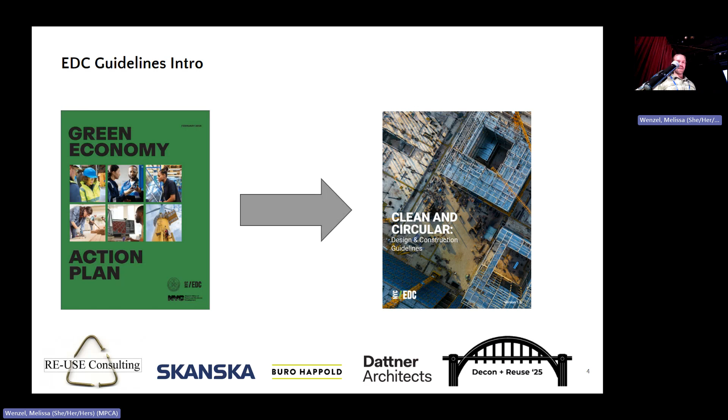And as part of these guidelines, I thought they did a really nice job of laying out some clear goals. These goals, I think, are fairly familiar to a lot of us - they're around diversion.

So the three goals being C&D diversion 75%, focusing on concrete and soil, 95% recycling or reuse, and requiring 25% minimum low carbon materials. And I would say actually we probably have some work to do with telling a better story around these goals, but for us...

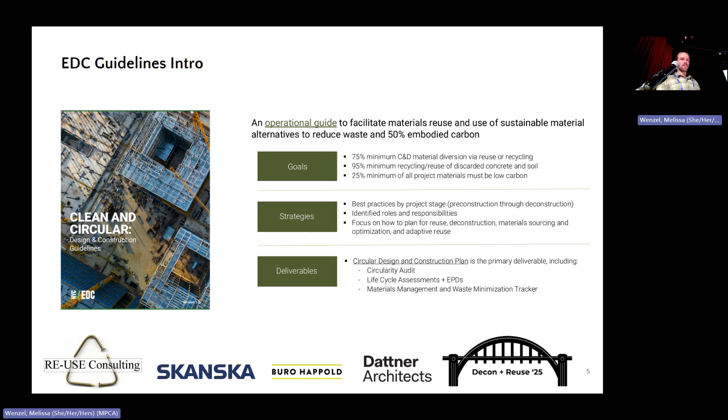It was a major catalyst for starting the conversation and thinking about what infrastructure for circularity is required in the city. So we all were brought together by a pilot project for this circularity guidelines called SPARC, which you'll hear about a bit more.

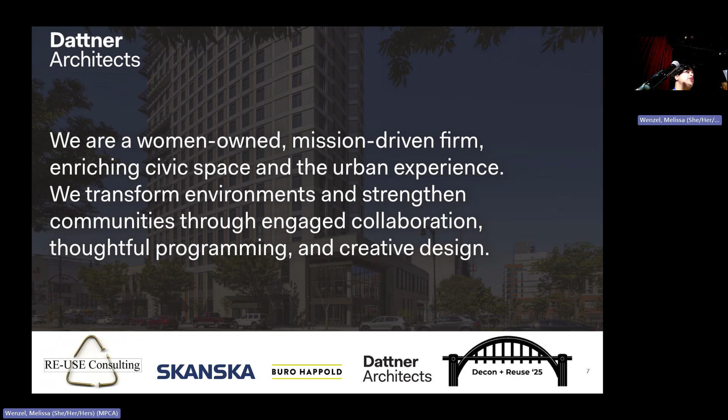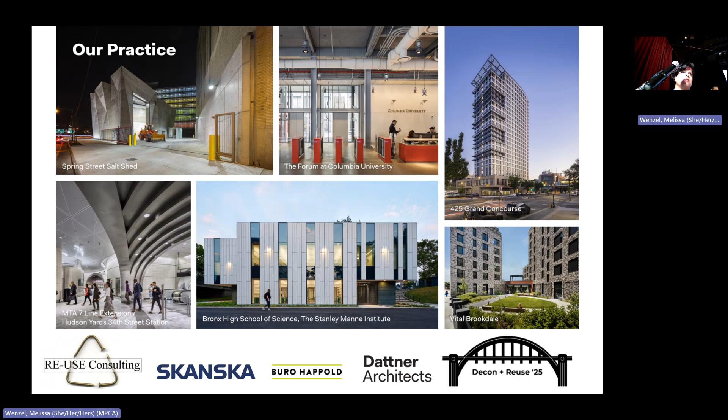So as I said, I'm with Dattner Architects. We're a women-owned architecture firm in New York City. Our work is what we like to call civic architecture. We have a studio that does affordable housing, a studio that does multifamily housing, mostly affordable, a studio that does transportation and infrastructure, and a studio that does cultural work, which includes education.

And so as part of that, and also as a practice, we're really passionate about sustainability. We're about 135 people, and of those 135 folks, 90 people are in our sustainable practice group. So it's pretty clear that's a big part of our firm ethos and why people want to work here. We have this internal sustainable practice group that's been really interested in circularity as a concept, and how we can set ourselves up to be ready to do a future circularity project.

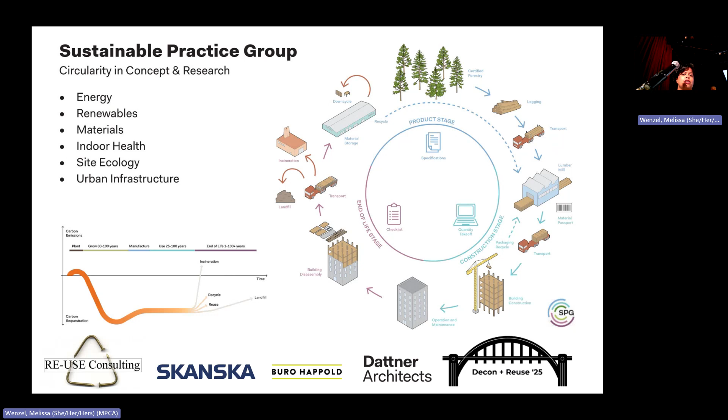A lot of our initial research was revolved around mass timber. And then, as Luke mentioned, NYCEDC released an RFP for the SPARC Kips Bay project, which really gave us an opportunity to talk about circularity in practice. So that's kind of how we all came together.

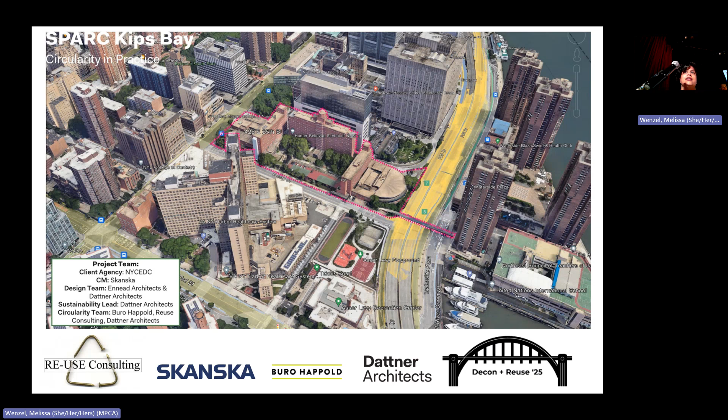So the client is EDC, and the primary stakeholders are the City University of New York and a New York City public school. The project is currently a CUNY campus. Because it is in New York City and an ultra urban area, the campus is very vertical instead of horizontal. The design team is Ennead Architects as the prime, Dattner is a sub, and part of our scope is the sustainability lead.

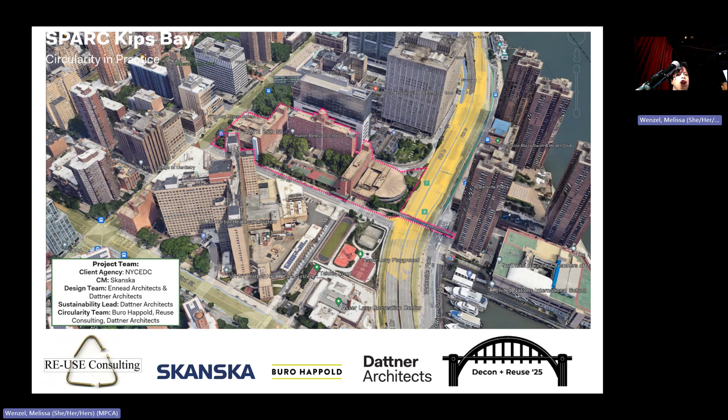And the circularity team is really Buro Happold, Reuse Consulting, Dave, and ourselves. And really the initial challenge was, how do we talk about deconstructing a 400,000 square foot building that was built in the late 50s? It really was not built with deconstruction in mind, and there was still a lot of hazardous material, and it was very much and is very much an active college campus.

But as you can see from these photos, there's this wealth of material in there, and it was really exciting to walk through the building with Dave and with the Buro team to think about how do we start doing this. How do we document all of this? How do we put this together? And how do we generate interest in the market so people will be ready to receive the material when we start work.

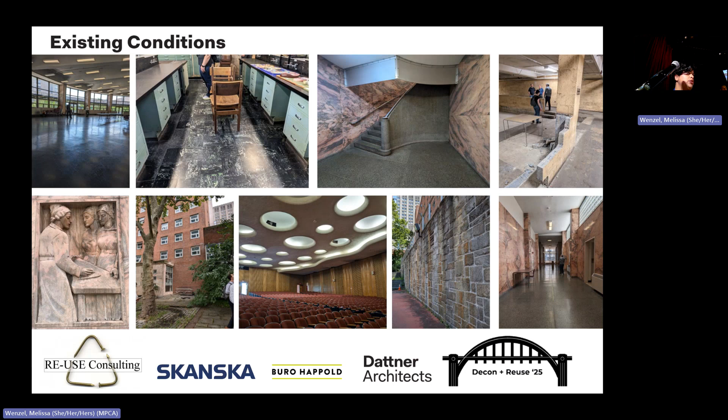So we're gonna, Jimmy will talk about it, but we're gonna start work in February. Okay, so basically what we did and where we are now is we did an audit of the existing building, which included creating all these tags and having this blue beam session.

So teams of two walked through the entire building, tagged each room with the material that was in there, and provided some qualitative information about it. Then we documented it, discussed strategies of what we could do with it, and then discussed potential outcomes, and then waited for Skanska to come and tell us what to do next.

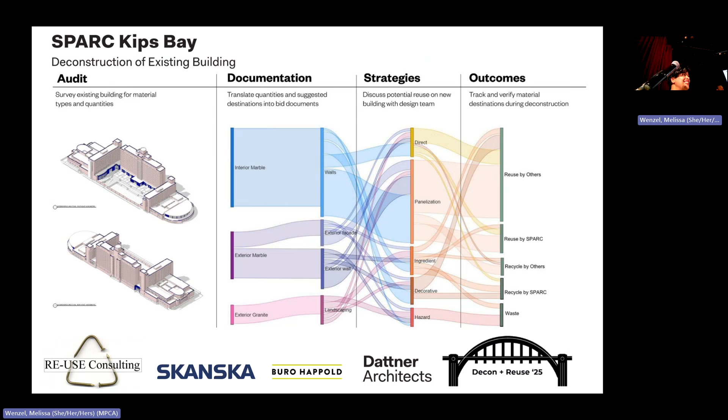And that is my segue. Thanks, I'll go quickly here.

It doesn't really work out very well, but we have this great network of folks. One of the great network leaders of our group in Nashville is Keith Lewaiso with Vanderbilt. We reached out to a few others as well and tried to find a home for it. We didn't, but then right when we started demolishing it, they reached back out, and Keith is working on a hopeful volunteer Living Building Challenge project in Nashville that is a perfect home for it.

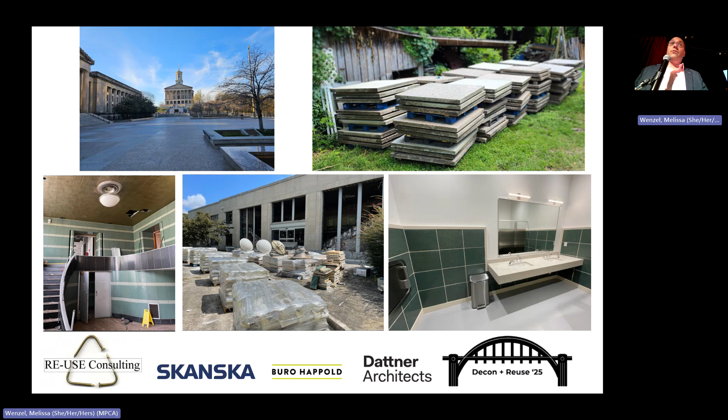So we pulled it off — there was an Oakland Cemetery new visitor center project that I was helping on, and some of the old green tile ended up going into the new visitor center's bathroom. This one was a little more organized, but again, kind of out of contract. But fortunately, it was a substitution for the new tile for those bathrooms.

One thing within Atlanta — Shannon Goodman, our great fearless leader and chair, is the executive director of Life Cycle. I helped her start that 15 years ago. We've had a great experience in the trenches together. But it's important to find these nonprofit partnerships if you have them in your community.

We were working on a hospital project not too long ago, and when we were doing a sanitary tie-in, we discovered these Civil War cobblestones, and ended up giving them to Life Cycle, who then gifted them over to Trees Atlanta. A keystone off the Atlanta Beltline says, 'Welcome to Trees Atlanta,' made out of this historical stone. So again, these are all examples of industry doing a good job, but off contract.

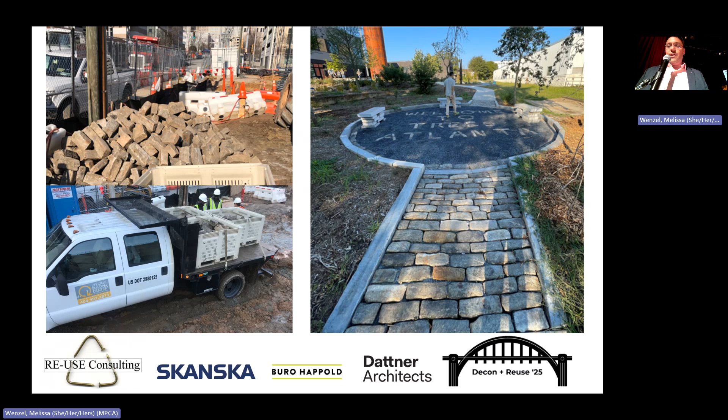Moving on to a couple project examples — I've spoken to this group about Kendeda before, but we did 28 reuse examples. They're all in the spec, part of the pre-construction process, saved us money, and wasn't a time issue either. At the end of the day, we only threw 49,000 pounds in the landfill in the process of building the building, but we reused 57,000 pounds. So because the Kendeda building existed, there's less waste in the landfill.

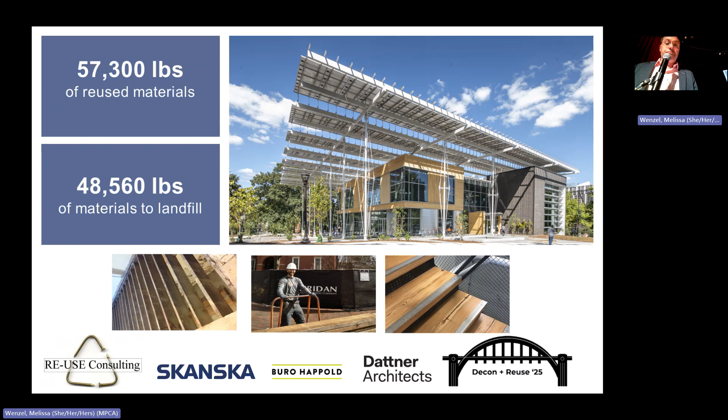My favorite example here is the Tech Tower job. But then on to our Kips Bay project in New York City. This one has the desire of being a contractual one — the EDC set it up that way — but it's going to be a great example because cost is not part of this process. So we're not able to spend an extra penny on reuse. All the reuse we're going to accomplish is going to be because it makes financial sense. And we're going to end up hopefully accomplishing a good bit.

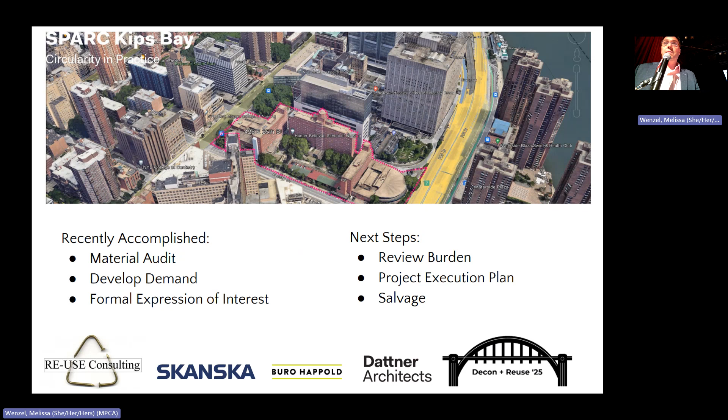We've had material audits, networks. We had like a bid day, but instead of it being a bid, it was an expression of interest in material. A good number of groups are interested in the materials, and actually tomorrow on site, six entities are touring it to take the next step to save materials from the building.

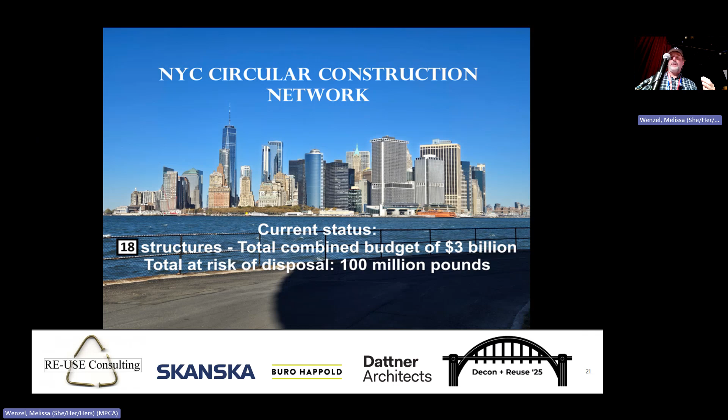And so I'm looking at all of those things at the same time for New York City. We're really trying to create the infrastructure necessary to support these projects. We can't just do a project, because what happens when the next project comes? It's too much work to do this over and over again.

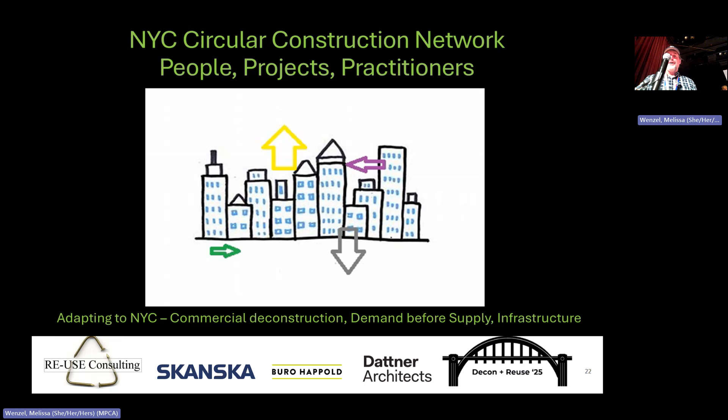We need the infrastructure that's necessary to support it. So we're connecting people, projects, and practitioners from throughout the region. And if you're in the region, please come talk to me after this. Hopefully we can talk later, because there's so much going on.

Now, what we're trying to do to create our own infrastructure is create a Reuse Innovation Center in Brooklyn. We picked out a location, and we have a team working on it now. We don't have any money, so you might hear a little bit about a fundraiser - we'd love it if someone would contribute a little bit, because we just need to get past that initial startup, and then we think it's going to really flow.

So we've identified 20 revenue streams that the Reuse Innovation Center could create. The Reuse Innovation Center is a circular business cooperative where we might have up to 20 circular businesses serving the New York City area and projects like this, so that when the next project comes along, we'll be ready.

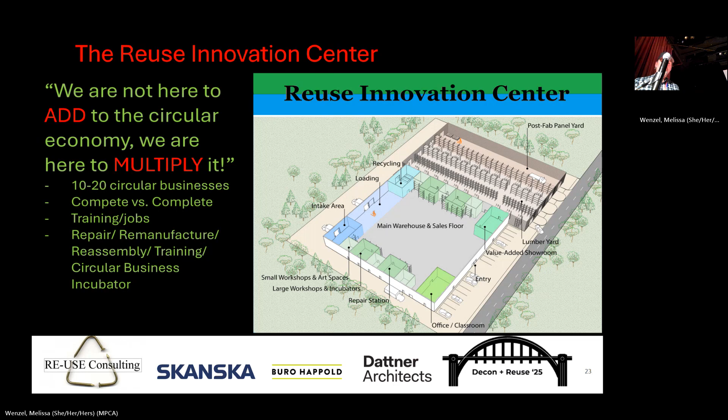That makes sense. Perfect. Thanks, Dave.

Jonathan, I think we're good. Okay, and we do actually, we're working on a project together, and we do like each other - most of the time, I think it's still okay. How many, actually before - it's still pretty quiet, right? How many New York folks do we have in the audience? Okay, very exciting. Yeah, we should bring it all on stage.

Okay, so Dave, you've outlined some pretty high ambition for the project - 100 million pounds. How do we really take the next step from that promise to practice? How do we all really pull this together?

Well, I would say that this is year 33 for me. I don't worry about the pounds as much - I mean, we happen to audit the building, so we know what they weigh, but really we've got to start somewhere. Everyone I've talked to seems like they're in a holding pattern. They're kind of like, this is too hard, we can't do this on our own, this is too complicated - so they don't do it. And I'm saying, well, can't you just start with something?

And so Spark, the idea is, can we start with something? And other projects - we have a library, we have Governor's Island, we have the climate exchange - these different projects where it really is like, we just need to stimulate activity. And then if we can start things like the Reuse Innovation Center, they will help you in the future reach that next level, because we'll work together on it instead of you having to figure it out for yourself.